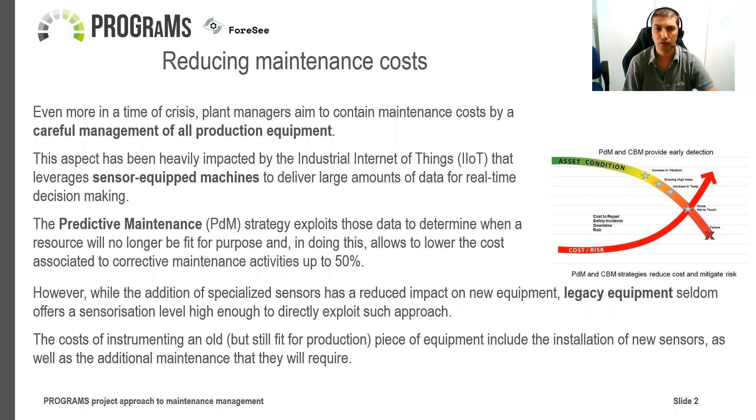However, while the addition of specialized sensors has a reduced impact on new equipment, legacy equipment seldom offers a sensorisation level high enough to directly exploit such an approach. The cost of instrumenting an old but still fit for production piece of equipment includes installation of new sensors, as well as the additional maintenance that they will require. Even when not taking into account these additional costs, a successful predictive maintenance strategy still requires knowing how to model the equipment behavior. Alternatively, data-driven methods may be deployed, but they have to face the scarceness of historical data.

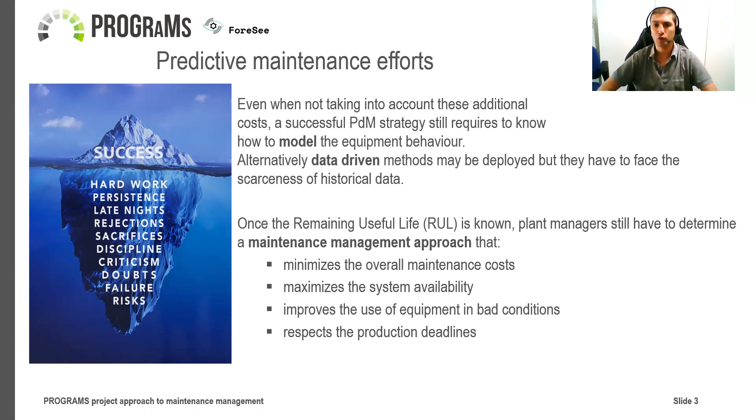Once the remaining useful life is known, plant managers still have to determine a maintenance management approach that minimizes overall maintenance costs, maximizes system availability, improves the use of equipment in bad condition, and respects production deadlines. Usually, this complexity leads plant managers to decide beforehand that it is not worth implementing a predictive maintenance program for legacy equipment, thus forfeiting the benefits of a modern maintenance approach.

Many companies will keep on performing maintenance in their traditional way because they do not believe that a different approach can actually help them save money.

The EU project PROGRAMS proposes to change this mindset with its suite of modular solutions that support plant managers through their entire predictive maintenance journey by determining which equipment it is profitable to deploy predictive maintenance on, providing a maintenance platform that can be operated by engineers instead of data scientists, and integrating maintenance aspects with the production plans and with the factory's everyday life.

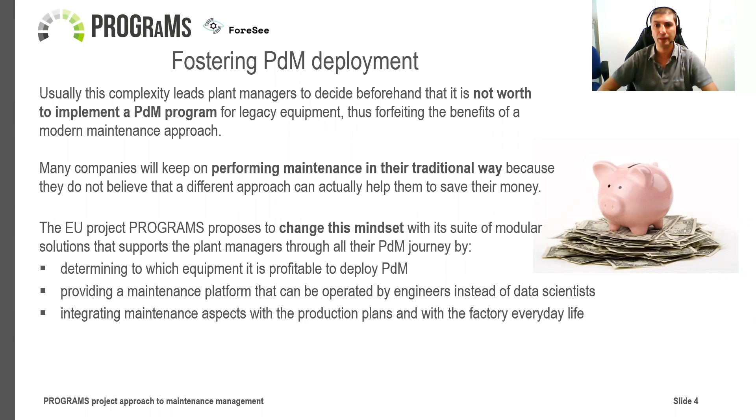To set up a complete predictive maintenance program, the starting point is to compile a list of equipment maintained components and their failure modes. Sometimes predictive maintenance is the only strategy safe enough to apply, while in other cases predictive maintenance might not be worth its investment, and different strategies may be taken into consideration.

PROGRAMS proposes a software-assisted FMECA module to chart all the failure causes, and a maintenance schedule optimization module to identify the components for which a predictive maintenance approach is more profitable than traditional corrective or preventive ones.

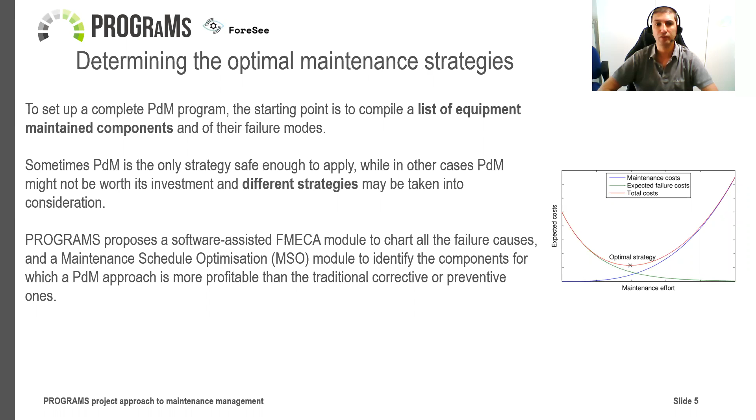The task of performing an FMECA is complex and time-consuming. Unless developed by a reliability expert team, FMECA worksheets are generally inconsistent and disorganized, and updating them can be even more complex. The PROGRAMS FMECA improves existing applications since it supports the user through all the steps necessary to complete the analysis.

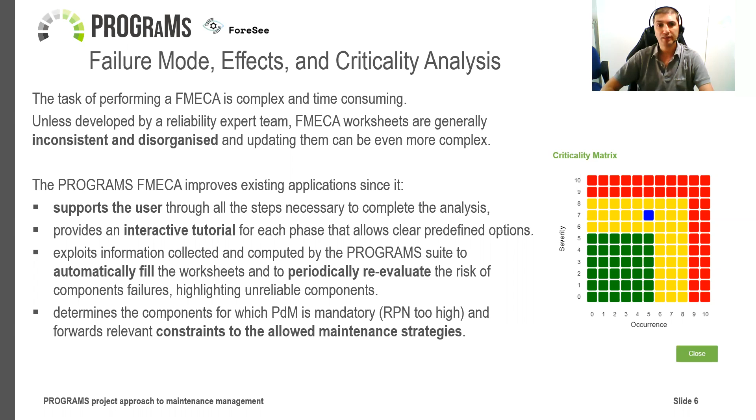It provides an interactive tutorial for each phase that allows clear predefined options, and exploits information collected and computed by the PROGRAMS suite to automatically fill the worksheets and to periodically reevaluate the risk of component failures, highlighting unreliable components. It determines the components for which predictive maintenance is mandatory, and forwards relevant constraints to the allowed maintenance strategies.

The MSO module aims to determine the most appropriate and cost-effective maintenance strategies and labor policies for all components of production equipment. The MSO integrates different software components.

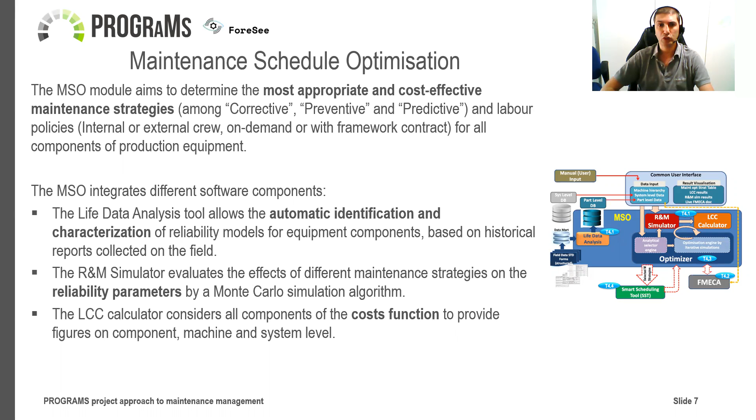The life data analysis tool allows the automatic identification and characterization of reliability models for equipment components based on historical reports collected from the field. The R&M simulator evaluates the effects of different maintenance strategies on the reliability parameters using a Monte Carlo simulation algorithm. The LCC calculator considers all components of the cost function to provide figures on component, machine, and system level.

To select the best maintenance strategies, a simulation-based genetic algorithm has been developed and implemented. The multi-objective optimization is driven by the minimization of the LCC and the maximization of availability, while considering the FMECA constraints. For each iteration, the reliability parameters are calculated by simulation, and based on them, the LCC and availability are determined for the user-defined lifespan period. The genetic algorithm includes a clustering extension which groups the maintenance of components to further reduce costs.

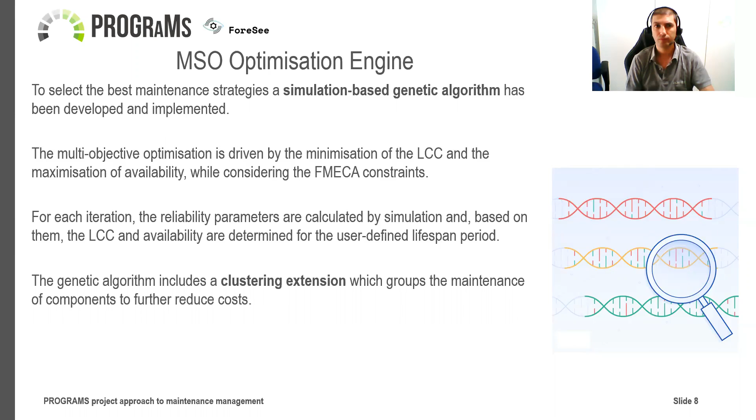Predictive maintenance is based on relevant factory data. This requires an IoT system that conditions, collects, cleans, synchronizes, and stores sensor data. PROGRAMS proposes its equipment control module.

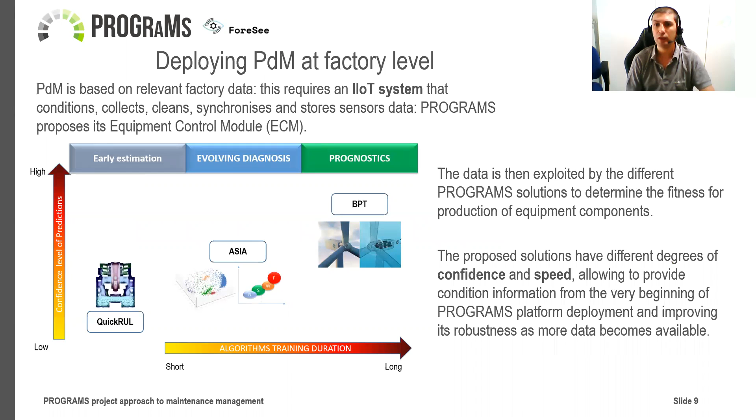The data is then exploited by the different PROGRAMS solutions to determine the fitness for production of equipment components. The proposed solution has different degrees of confidence and speed, allowing it to provide condition information from the very beginning of the PROGRAMS platform deployment, and improving its robustness as more data becomes available.

The PROGRAMS equipment control module is a cyber-physical system comprised of the following components: a modular and insulated section of digital and analog inputs for connecting sensor wires, a programmable controller to process the inputs and relay data, and an industrial PC acting as a gateway to the cloud database and performing real-time data acquisition from equipment controllers.

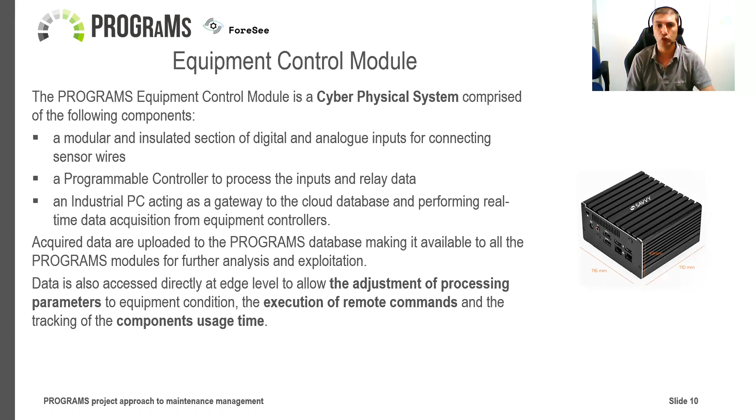Acquired data are uploaded to the PROGRAMS database, making it available to all the PROGRAMS modules for further analysis and exploitation. Data is also accessed directly at the edge level to allow the adjustment of processing parameters to equipment condition, the execution of remote commands, and the tracking of the component's usage time.

When the available amount of data is insufficient for more complex evaluation techniques, the Quick RUL estimates component RUL by exploiting a physics-based analytical model of mean time to failure, fed by monitored process signals and design data. The MTTF is calculated using the lifetime formulas given by the catalogs of the component manufacturers.

Once the MTTF of a component is known, the remaining life can be ascertained as the difference between the MTTF and the usage time. So far, calculation algorithms have been implemented for machine tool ball screws, linear guideways, and spindle bearings.

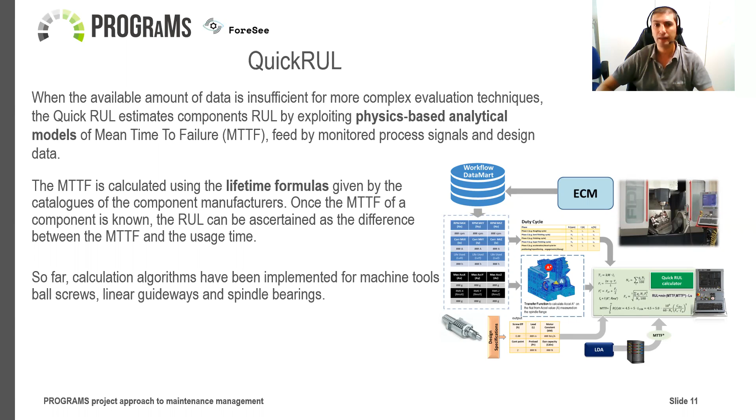ASIA is a diagnostic module based on the system invariant analysis technology that uses a data-driven approach to evaluate the general status of equipment. ASIA allows the user to identify unexpected behavior of the equipment without any knowledge of the relevant models.

At the beginning, when the dataset and training of algorithms is limited, the module only provides the expected state of the equipment. As the training time and ingested data increase, the diagnosis becomes more robust, and the ASIA output includes the prediction of the RUL of concerned critical components of the equipment.

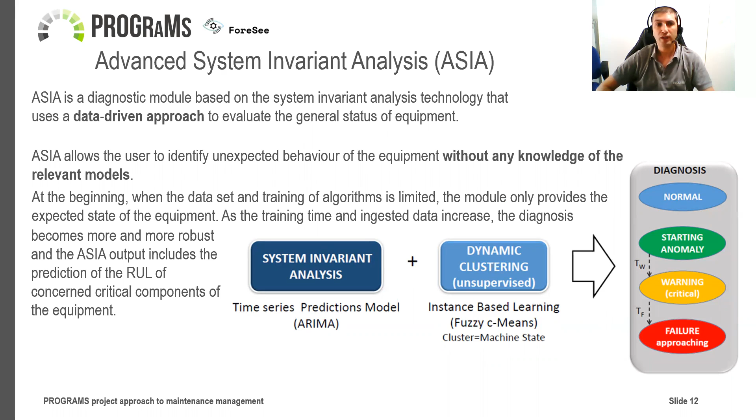To determine the RUL of critical equipment components, a digital twin is a proper approach. Relevant physical models can be created by a three-stage methodology: definition and creation of components models, modeling of virtual sensors, and tuning of the digital model parameters by fitting the simulated and measured signal responses.

Once the equipment component's digital twin is available, it can be used to estimate the RUL by predicting when the deviation of a selected parameter exceeds a predefined threshold. In PROGRAMS, this methodology has been applied to 6 degrees of freedom robot reducers and milling machine tool ball screws.

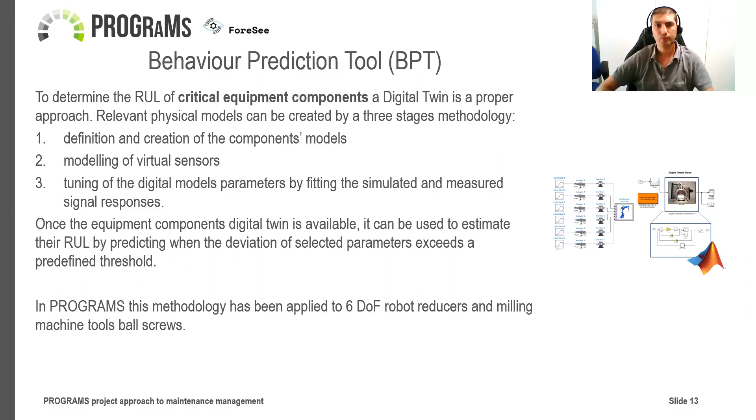Total productive maintenance is a production management methodology aiming at continuous improvement of equipment effectiveness. The planned maintenance pillar requires scheduling maintenance tasks based on predicted failure times or measured failure rates. The smart scheduling tool achieves this objective by merging PROGRAMS platform information with factory legacy ERP system data.

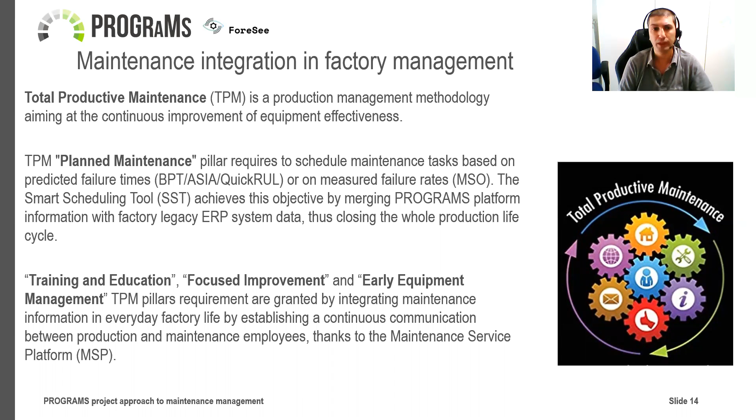This closes the whole production lifecycle. Training and education, focused improvement, and early equipment management TPM pillar requirements are granted by integrating maintenance information into everyday factory life by establishing continuous communication between production and maintenance employees, thanks to the maintenance service platform.

The SST feeds on data produced by other PROGRAMS modules to determine a weekly or monthly based schedule for maintenance activities, then uses a heuristic algorithm to achieve the best integration between the computed maintenance schedule and the production activities programmed for the same period.

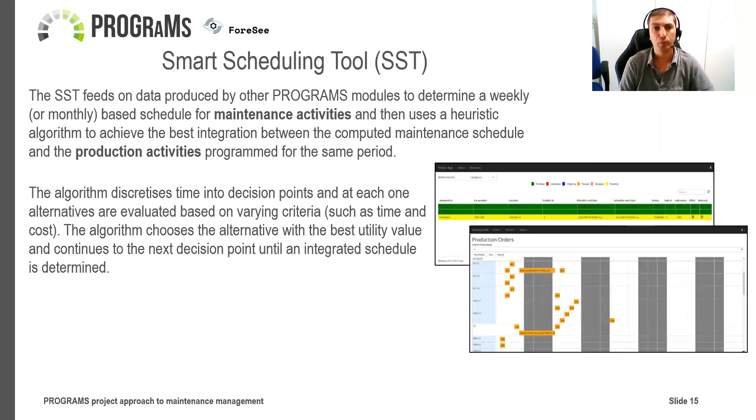The algorithm discretizes time into decision points, and at each one alternatives are evaluated based on varying criteria such as time and cost. The algorithm chooses the alternative with the best utility value and continues to the next decision point until an integrated schedule is determined.

The PROGRAMS MSP allows notification of interested personnel about the status of production equipment and planned activities by adopting a social network paradigm. In this way, people on the factory level can make informed decisions and best act when a problem arises.

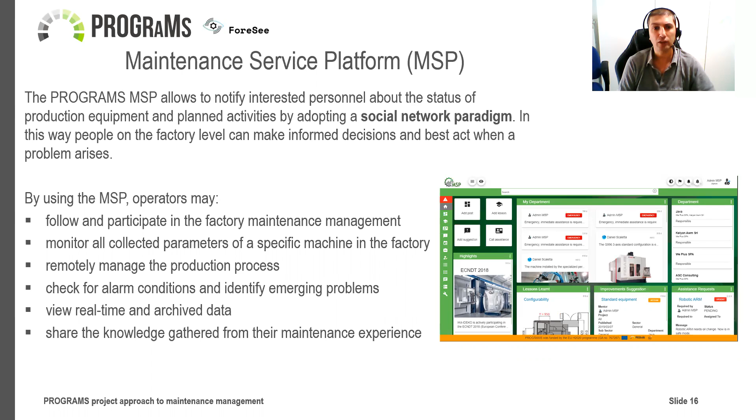By using the MSP, operators may follow and participate in factory maintenance management, monitor all collected parameters of a specified machine in the factory, remotely manage the production process, check for alarm conditions and identify emerging problems, view real-time and archived data, and share the knowledge gathered from their maintenance experience.

This picture gives an idea of the programs platform architecture. It is clear that the programs modules are connected into a single platform, and the architecture proves that no module is an island.

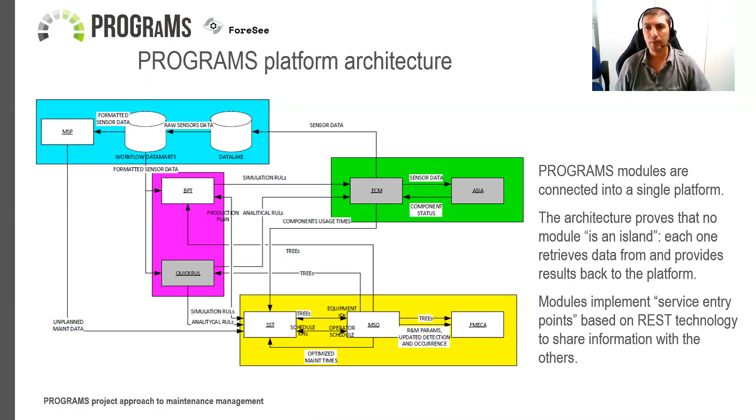Each module retrieves data from and provides results back to the platform. Modules implement service entry points based on REST technology to share information with the other ones.

Programs platform will be tested on pilot lines from very different production context end users that currently follow the baseline of preventive maintenance. End users expect reduced breakdowns, downtimes, and overall maintenance costs.

Easy maintenance management is possible even by untrained personnel, with improved quality achieved through remote equipment monitoring and control.

AURRENAK manufactures molds and tooling for the mass production casting industry using milling machine tools. Its major customers belong to the automotive sector.

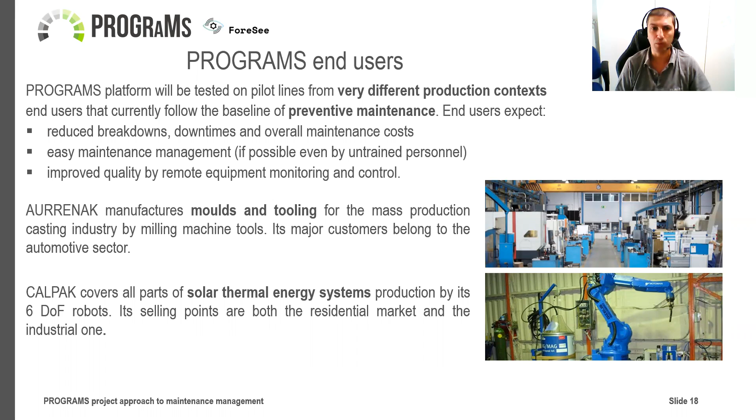CALPAK covers all parts of solar thermal energy system production with its 6 degrees of freedom robots. Its selling points are both the residential market and the industrial one.

This is the current status of the project.

ECM has been deployed on both end user lines and currently allows remote monitoring of the selected equipment. Pilot lines have been enhanced with accelerometers, thermometers, and a vision system capable of verifying the quality of the welding process.

Legacy maintenance information has been provided by the equipment producers to allow proper evaluation of the equipment components' lifecycle data and FMECA analysis. Production plans and equipment-specific information has been shared by the end user to allow modeling activities at all platform levels.

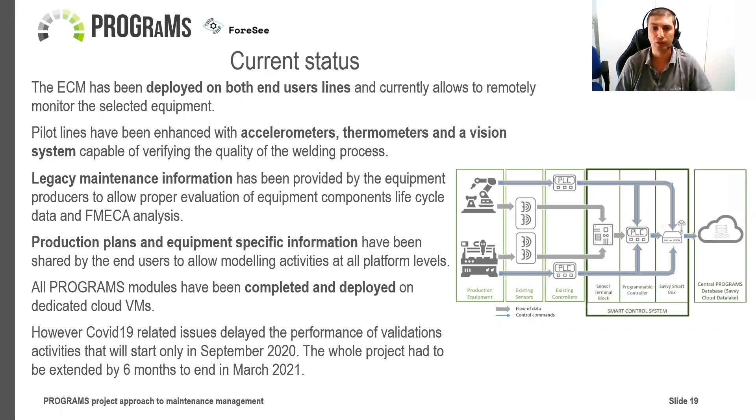All programs modules have been completed and deployed on dedicated cloud virtual machines. However, COVID-19 related issues delayed the performance of validation activities, which will start only in September 2020. The whole project had to be extended by 6 months to end in March 2021.

The programs platform comprises and interconnects all the modules described so far. Some of them are brand new in their concept, others improve existing solutions to allow an integrated management of the whole factory maintenance activities.

Programs aim at demonstrating that the integration of different modules allows predictive maintenance to be exploited further than usually achieved. A careful selection of maintenance strategies, including but not limited to predictive maintenance, allows the life cycle cost of equipment to be lowered while its availability increases.

The predictive maintenance strategy can be profitably applied even to legacy equipment components. A predictive maintenance platform can be managed even by people with limited training if available data is properly exploited and decision-making support is provided.

Thanks to these results, programs aim at getting plant managers to change long-held maintenance practices and finally introduce predictive maintenance in their production lines.